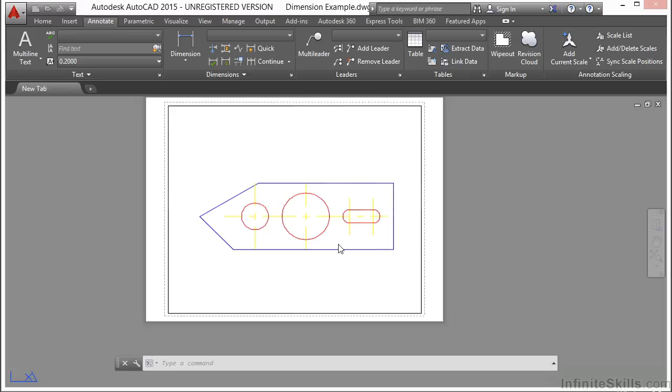Browse to this chapter's folder and look for the dimension example.dwg file and open it up. Go to the Dimension tab. Now here we have several different dimensions already put in here.

You can make changes to dimensions through the Properties panel. You can open that up by pressing the Control key and the number 1 key at the same time. Now if you want to change the text value, double-click the text, and that will open it up in a text editor. You'll have what looks like your multi-line text editor contextual ribbon right up here, so you can get access to your justification, your fonts, your colors, bold, italicized, etc.

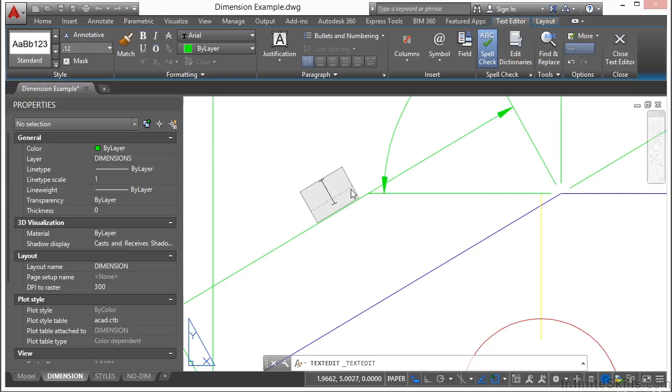You can even match properties inside the text editor. You can change your text style, or you can type things in. So let's say that we need to represent this not with the measurement, but with some actual words. Just select that text object and press delete or backspace. That will erase it, and then you can type in anything else. I'm just going to type in something simple. Side view. If you press enter, it carriages down to another line.

So what you want to do is just click somewhere outside with your mouse, outside of that text. And there is your text. You can override that quite easily.

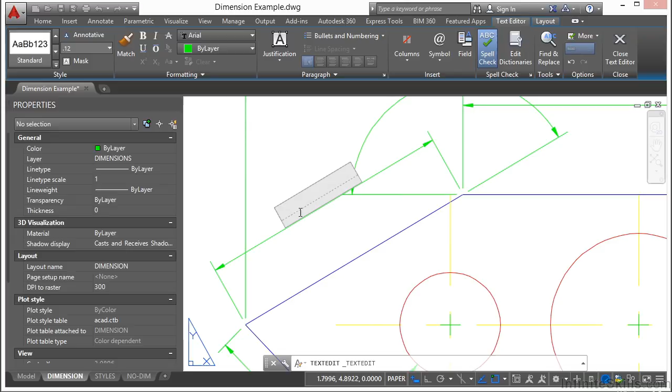So double click the text, and this works just like a regular text editor. You can move with your arrows, you can delete, and if you want your measurement value back, you type in less than and then greater than, and it puts in the actual measurement for you. But you can do all sorts of things. You can type in text just like that.

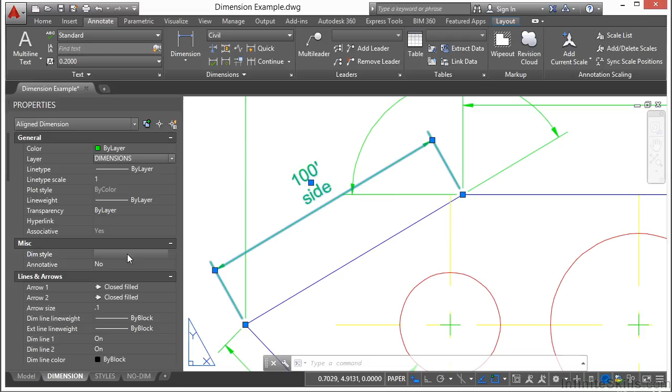Now, if you select your text object and come to the Properties palette, you can change the color here, but remember, please don't ever change it to anything else but ByLayer. You can change what layer it's on if you need to, change the line type, all of your regular object selection type styles, and you can change the different type of style.

If we scroll down, we can override some of the other features here. Typically you're not going to want to override any arrows or anything like that, except for very special cases. If you need certain or specific arrowheads, you can do that, though I'd suggest creating a style specifically for that purpose.

But you can change some of these objects here. Just click on them, find the one you want, and it will make it into a dot or an arrow. Now you have an arrow 1 and an arrow 2, just like you'll have a dimension line 1 and dimension line 2, and so on. All of the items that refer to number 1 are the very first one that you click. So when you create your dimension, wherever I click first will be arrowhead 1, extension line number 1, and my second selection will be number 2.

I'm going to delete this. So if I select my dimension again, and I want to turn off some of my dimension lines, like right here, select it and turn it off. That'll be this left side.

Now your dimension line is the line, it's sort of horizontal. It goes from extension line to extension line, and it's where the arrowheads go. I can turn them both off if I'd like. That way I have just the text and just the extension lines. It's a rare case that you would want something like that, but you can do it.

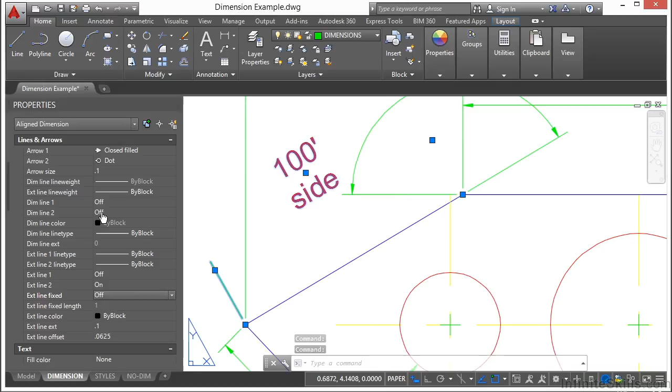Now your extension lines, you can turn off and on as well. Just select it and turn it off. And I'm going to turn my dimension lines back on. Sometimes this is something you might want to do: leave your dimension lines on, but turn off your extension lines.

So you can see here, there are a lot of different things you can change. You can also grip edit a dimension. So if I select a dimension, you can see I have a couple of different grips here, and each one of them has different traits.

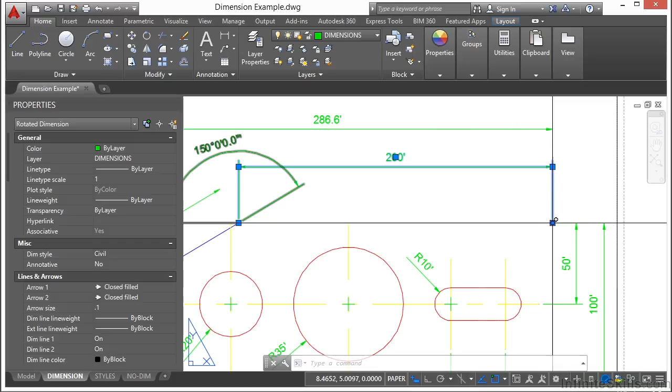So if I select this point, this changes where the dimension is, so it's dimensioning to a different spot. Once you move it, your value will change, and you can change that at any time. These grips here at the arrowheads will reposition it, up or down like that. And the grip on the text allows you to move it and put it in different locations.

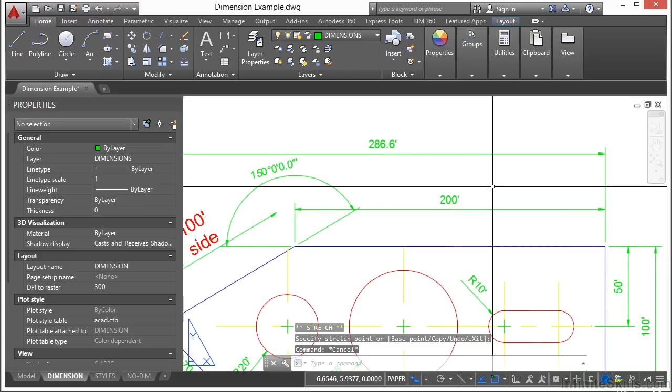Now, if you raise it up or raise it down, your extension lines and your dimension lines will follow it with you.

So that's a great way to align these and use them the way you want to. There are a lot of other dimension tools on the ribbon. Go to the Annotate tab, and you can find a lot of different items right here, with even more at the bottom. Let's go over some of them.

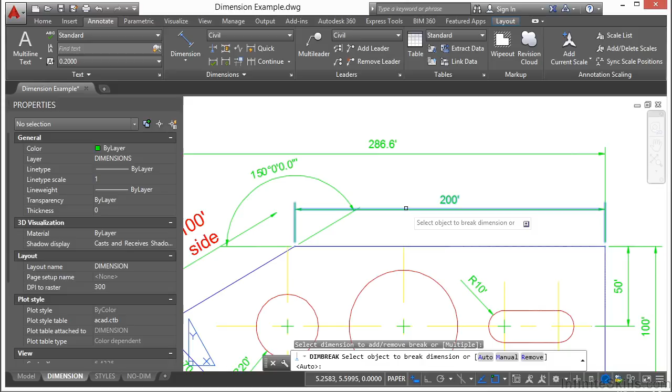This puts a break in your dimension. You select the tool here, then follow the on-screen instructions. Select the dimension you want to add a break to, then select the dimension that goes through it, and it will automatically size that for you. That's a nice little feature.

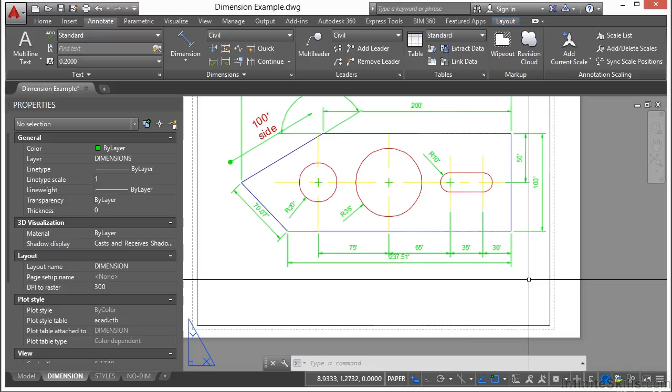Another one you might want to use is Adjust Space. This adjusts the space between your linear dimensions. If I select the baseline and then select the one to change, right click, I can just choose Auto, and it will automatically adjust it to a certain size. This is good if you want a lot of stacked dimensions with the exact same spacing throughout the view. That'll keep your drawing looking real nice.

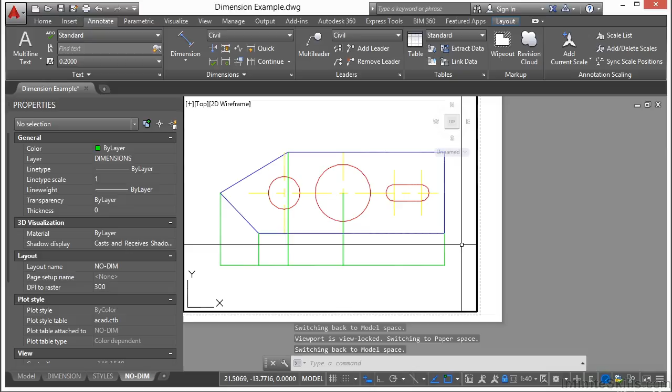This Quick tool will draw dimensions very quickly, but you have to be in model space and able to select items. I'm going to select several different items here, and then it does this. Of course, it's not to the proper scale—I don't have this set up correctly—but you can see it puts all of the dimensions relative to that view in there right away, real quickly. You don't have a lot of control over it, so it's not something I use a lot, but in some mechanical drawings it might help you get a string of dimensions in there very quickly.

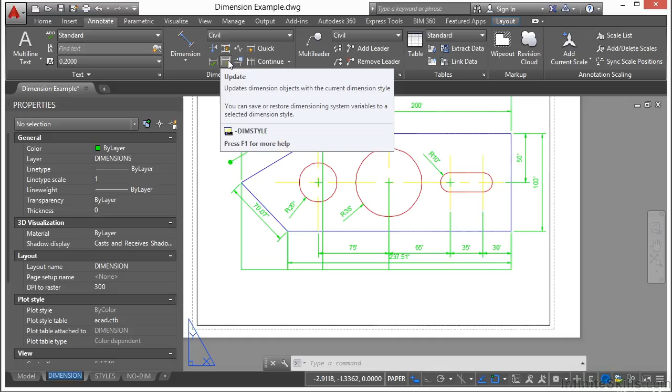This will add inspection symbols to your dimension. This will update your dimensions to a current style—sometimes dimensions don't update right away if you've changed the style. If you click this tool, select the dimension object you want to update, then press enter, it will recalibrate that dimension to look like the style it's assigned to. That's a quick way to fix your dimensions if they get messed up.

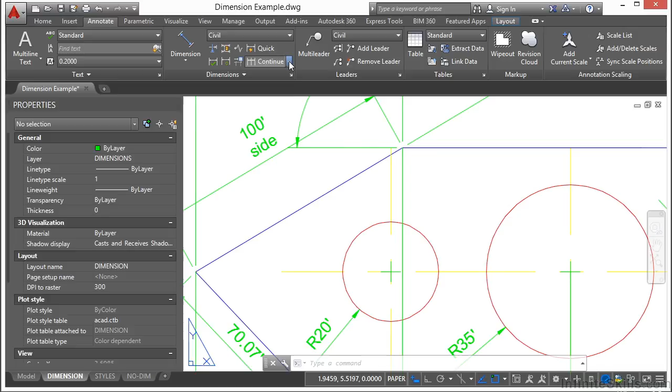This will reassociate dimensions that come off of the wrong points. This is the Continue option. I use it often—there are two different types of continues.

So if I go to this dimension style here, I'm going to erase these so they're out of our way. But if I start a dimension here and click on Continue, it's going to pick up right where I left off, so I can continue dimensioning. As you see here, it goes on and on.

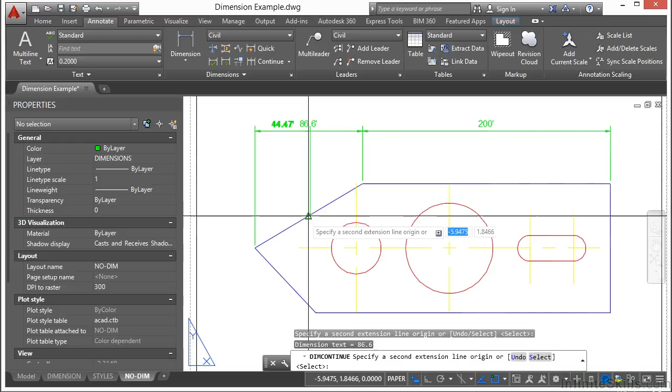Now you can do the linear, or you can do stacked and baseline, and it remembers the last one you used. However, if you don't want to use that one, once you start the command, type in the letter S, press enter, and then select the baseline you want to start with. And there you go—they both work the same way.

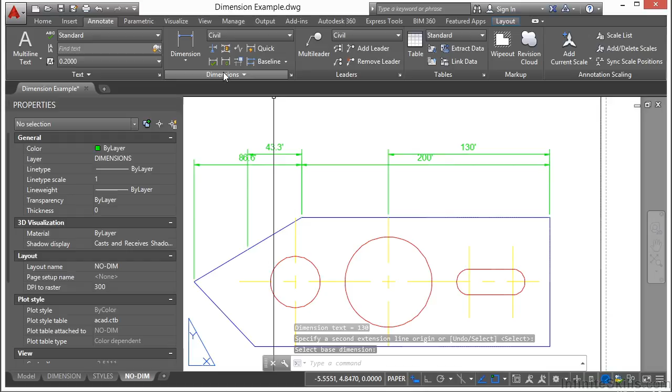Now there are a few other things in here I really want to show you. I want to show you the jog line. Let's say you want to create a dimension and show a jog in it—maybe it's an estimated dimension that you're showing off, like an extension. Sometimes we need to put a little jog in our dimension line.

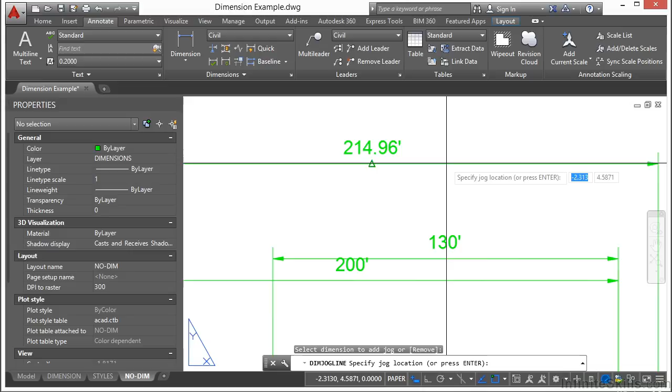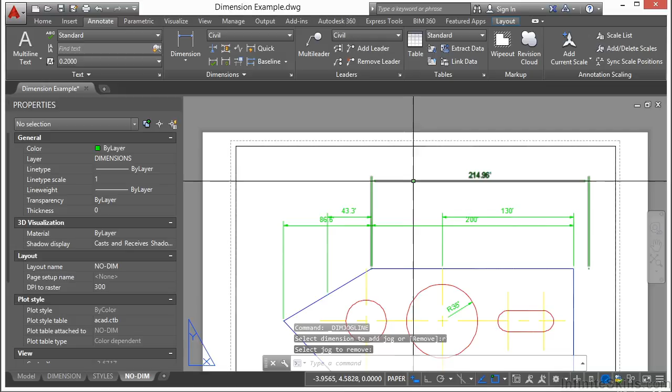It's okay—you take your dimension, start the Dimension Jog button, just click on it, select your dimension, and then press return. That will put your jog right in, and then you can click on it and drag it left or right, wherever you want. Now if you want to remove a jog, start the command again, type R for remove, press return, select the dimension, and it goes away. That's a nice little thing you can do.

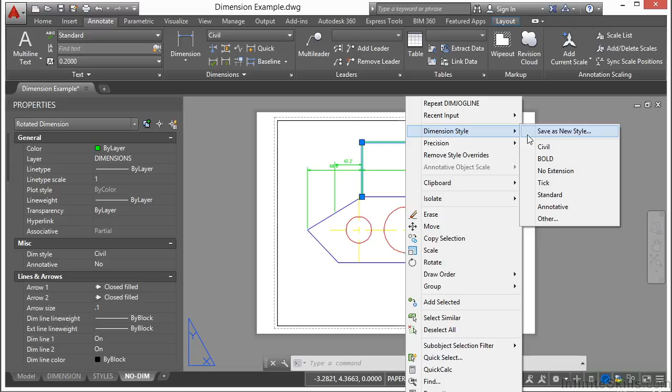Also, if you select a dimension and have your right-click shortcut menus on, you can access different things here like dimension style. You can change the dimension style, or if you've changed the dimension settings some way and want that to be a brand new style, you can click here to save it as a new style. You can remove style overrides. You can also change the precision of your dimension so it can go to more or less decimal places. So there are a few things you can get to with a select and right click.